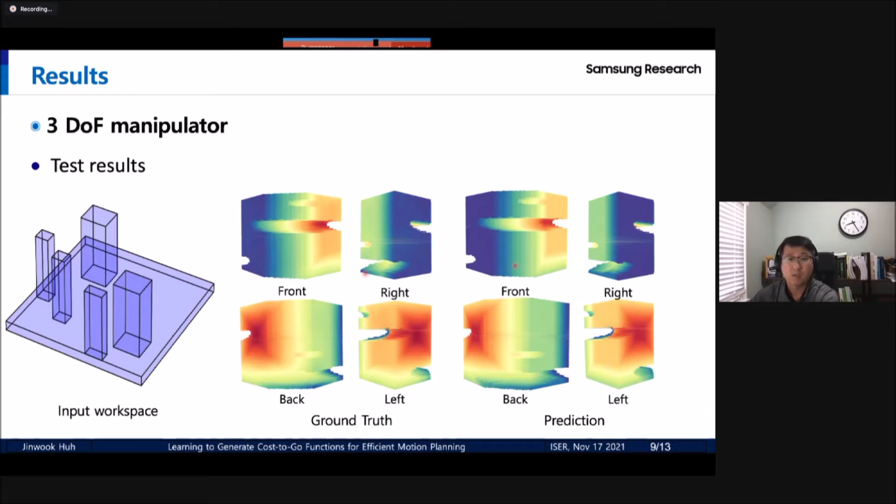In the 3 DoF manipulator case, we input the 3D voxel data into the network, and then predict the cost-to-go value in the configuration space, as shown in these figures. This result is very similar to the ground truth.

The average computational time for planning is less than 200 milliseconds. One good point about C2G is that it takes only 2 milliseconds to generate the parameters of the cost-to-go function. So in a new environment, we can easily generate a trajectory, and the trajectory generation time is almost real-time.

The contribution of this paper is that we suggest the C2G framework, which can generate a continuous cost-to-go map directly from the workspace without any discretization or considerable iterative propagation of cost values. It can generate a smooth and efficient path, and is significantly faster than traditional approaches.

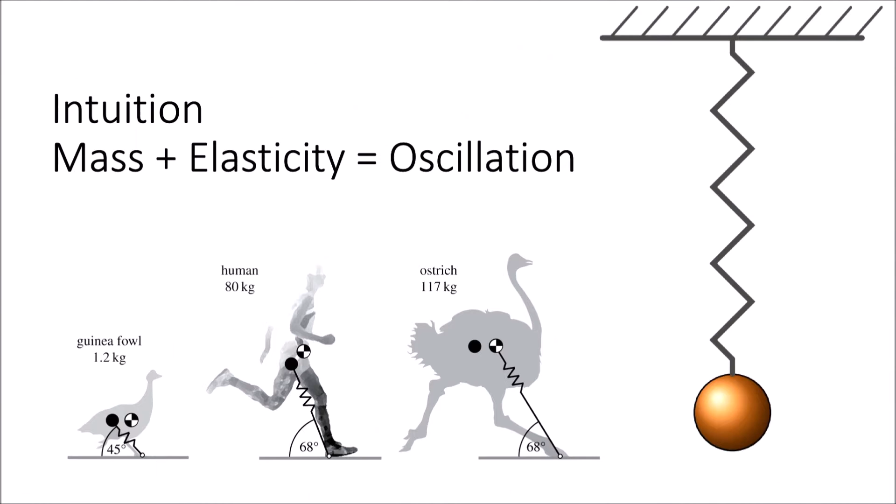You can see on the right the usual spring mass system, which helps us build intuition on a linear level, but there are a lot of studies on biomechanics backing up this intuition. This is indeed one of the reasons why we started putting elastic elements into our robots, leading to soft robots.

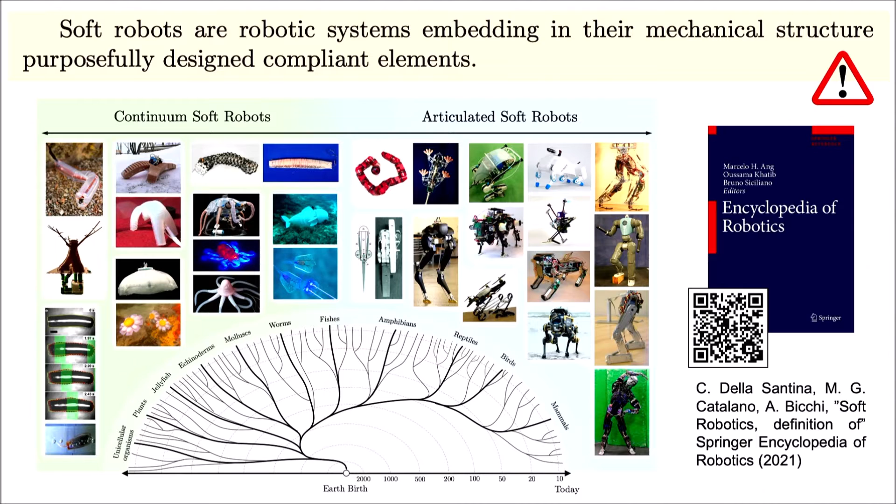Yesterday I discussed continuum robots. Today I will talk more about articulated soft robots or elastic joint robots. In general, these are systems more inspired by vertebrate animals, so we have a rigid skeleton, but then we have elasticity and softness at the tendons and joints level.

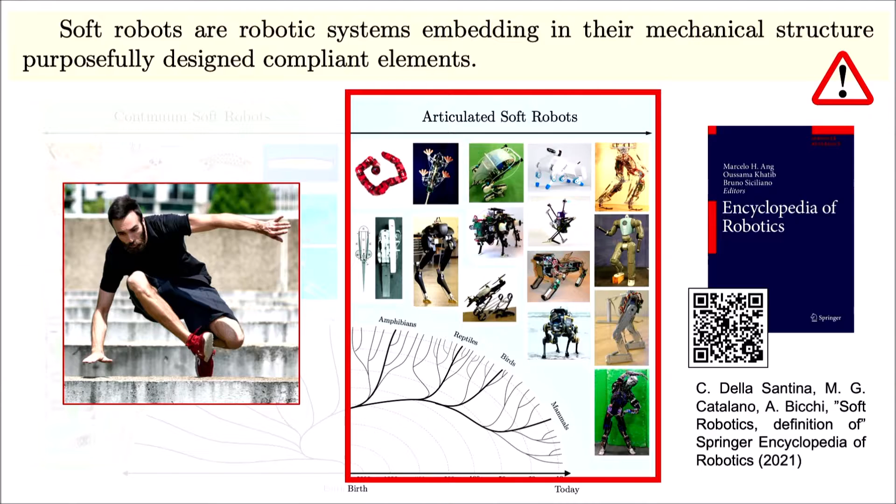If you take a mechanical system, start adding some springs, and just let it evolve, this is what you get most of the time. You start with some expectation that everything is going to evolve in open loop nicely, but what you get more often than not is chaos, even for very simple systems. This is just an open loop evolution of a double soft pendulum, a simpler model of a walker.

So what we've been doing in the past few years, together with Alin Albu-Schäffer, is introducing a framework we call controlling eigenmanifolds. In a nutshell, the idea is to go from the standard pseudo-chaotic behavior found in nonlinear elastic systems to recover some regularity.

The goal of this specific work, this ISER 2020 paper, is twofold within this framework: to provide a first experimental validation, since so far it's been mostly theoretical, and to understand if some closed loop control we had in mind could actually be useful in practice. I'll give more detail later.

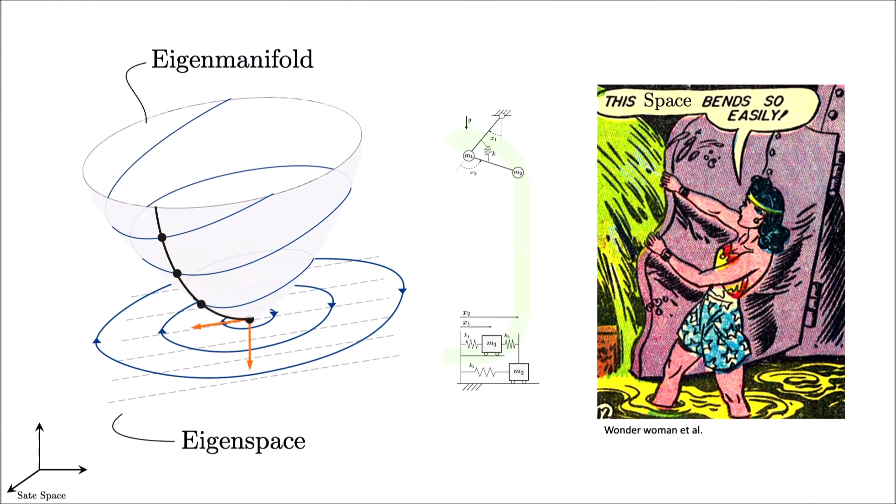Probably the most important thing is that, behind all the theory, right now we are evaluating these manifolds by hand, but we will hopefully soon release a toolbox for automatically extracting this structure for a given description of a nonlinear mechanical system.

Just to give you a flavor of how these eigenmanifolds look: this is a double pendulum with some elasticity. For each energy level you get a different nonlinear oscillation, and this is just one section of the eigenmanifold—these are open loop oscillations of the system.

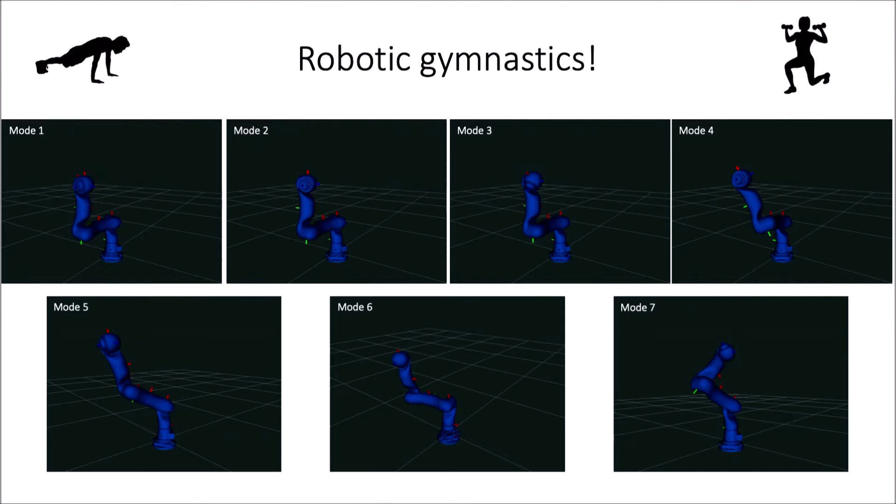And these are instead for a KUKA lightweight robot—if, just for fun, you add some springs in parallel and let it evolve in open loop. These are sections of each of the 7 eigenmanifolds this KUKA robot has, for a given energy level. It's not super clear, quite dark, but I hope you can figure out something from it.

So I will speed up now. Once you have a description of what the robot can do, you can try to design closed-loop controllers to help the robot express its capabilities, rather than forcing some behavior from outside.

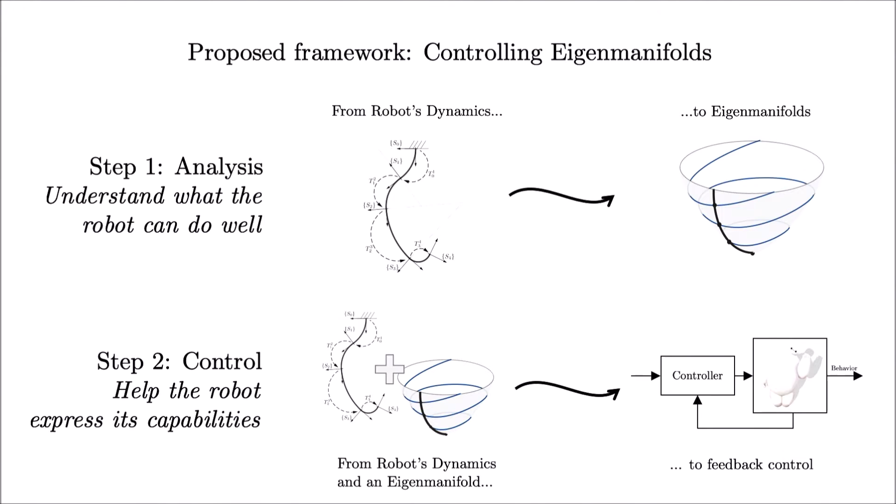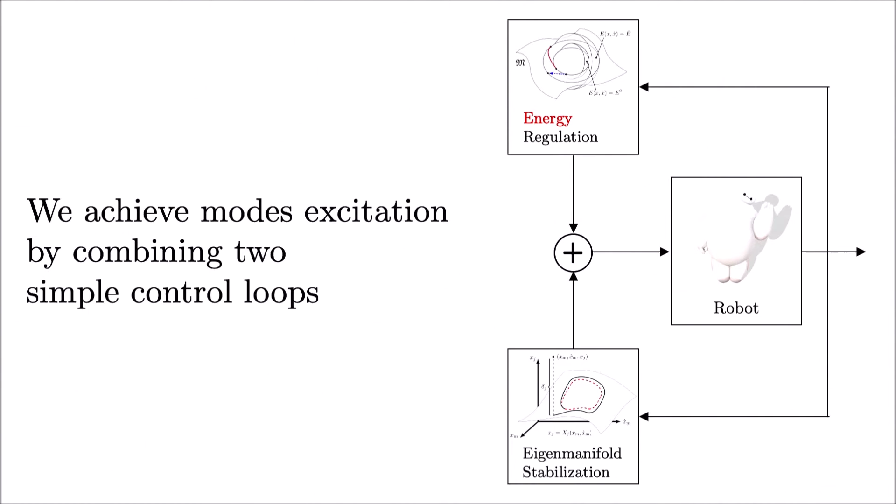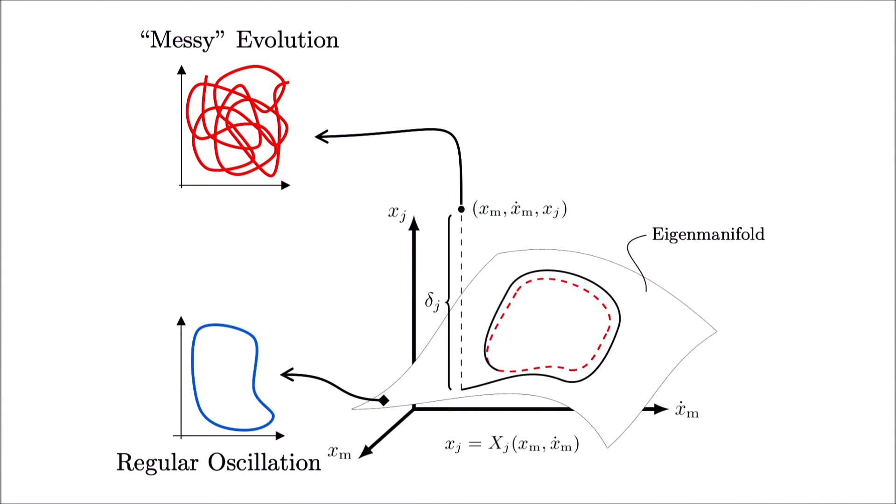And you can do that with feedback control. We do that with two kinds of hierarchical closed-loop thinking. The first part is eigenmanifold stabilization. The idea is very simple: if you are outside an eigenmanifold, the behavior is messy; if you are on the eigenmanifold, the behavior is nice. So let's just select one eigenmanifold and make it an attractor of the system by means of feedback control.

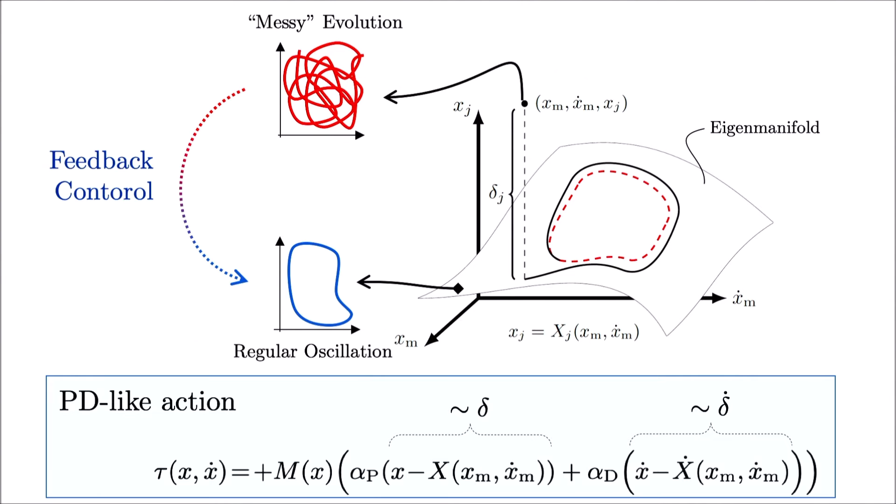And it comes out that already a kind of simple PD-like action works. This is nice. The problem starts with the other part, which is the energy regulator. Intuitively, you can label each of these oscillations with a different energy level, at least close enough to the equilibrium, and it's just a mess. So how can you regulate this energy without ever leaving the eigenmanifold, which is the important thing?

I guess none of you really want to go into details here, but this comes the second part of the ISER paper, which is to test a bit more of a simpler controller that in theory is super hard to prove, but in practice our intuition tells us it should work. And then they say, okay, let's first test it, and then we will try to prove it. It's just a very simple bang-bang action.

So the idea is that you have to compute a certain generalization of the energy of the system, and if you are above the desired energy, you just remove a constant amount - well, it should actually be the other way around - but if you are below, you inject energy. So it's a kind of bang-bang controller, and that's it.

Okay, so a lot of theory, but again, we are in experimental robotics, so let's try to see how this works to give some reality check. In the ISER paper, we focused on a segmented leg. It's kind of inspired by a small dog, and here you can see overlapped the kinematics where the springs are, and this is the evolution recorded for an open loop evolution.

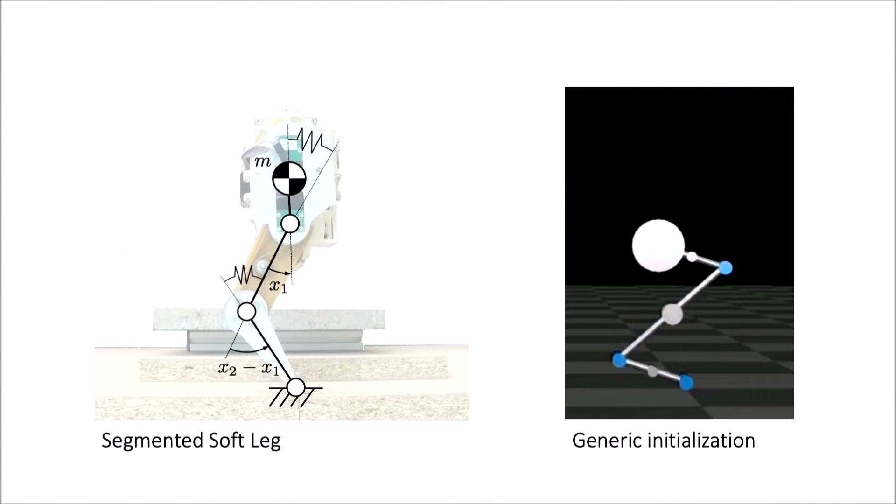And you can extract the modes. Again, this is kind of how the mode looks - quite a non-flat surface - and this is how the acceleration field looks, projected on the eigenmanifold. And this is just one of the modal evolutions, how it looks projected in configuration space.

So this is how the whole thing works in simulation, which is always easier - at least, maybe not easy, but easier - but I think it's nice to show what happens after a few seconds. This converges to a steady state, and the nice thing is that this is the control action, and the steady state has almost zero injection of torques or energy, because again, this is an open loop evolution of the system if you don't have dissipation. So you end up with this hyper-efficient oscillation in the end.

And something bad is happening. Okay... okay, it recovered, incredible.

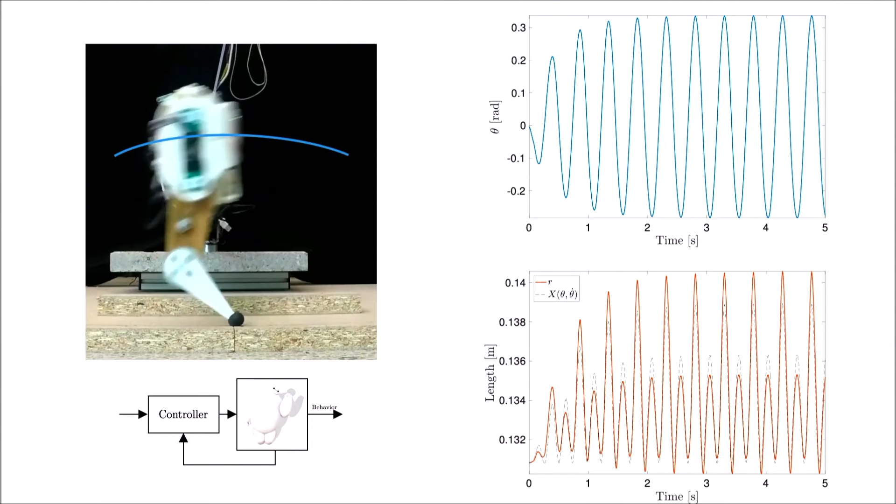So this is what, if you now go on the experimental side - we do the same thing, and this is the same controller, with the actual leg, and these are the oscillations you have for a few seconds of energy injection, and then it's this steady state oscillation.

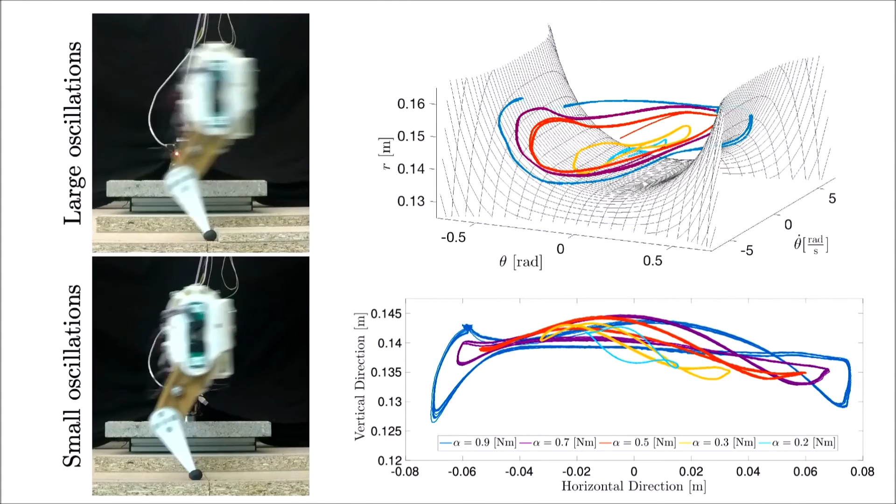And you can do that for different energy levels. These are just some others, and this is how the actual oscillations are - super repeatable, and they are quite close to the idea.

So you have an under-actuated system? No. We can discuss about that later, but right now, no. I mean, the real system is under-actuated, but the model is not.

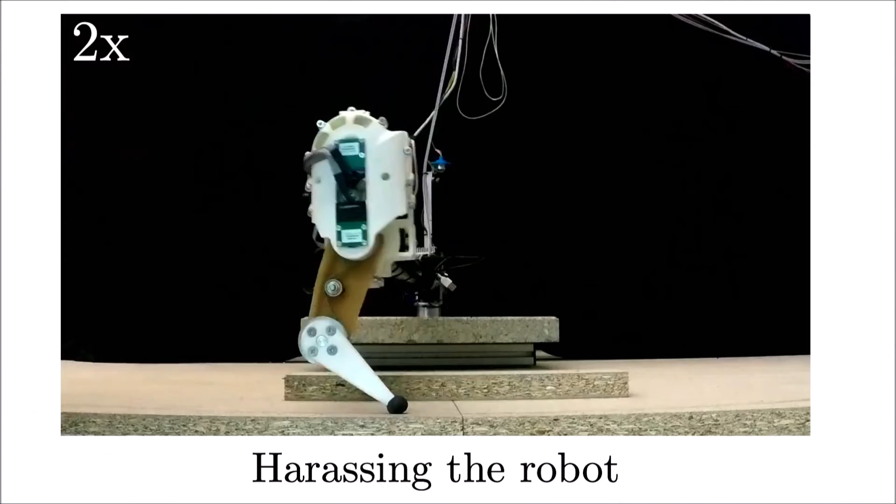But the nice thing here is that when you do a lot of theory and you have a lot of nonlinear control stuff, more often than not you end up with something that's super fragile, and this is how the whole thing behaves. So it's quite robust, and the intuition is that here we are just stabilizing the natural behavior of the system.

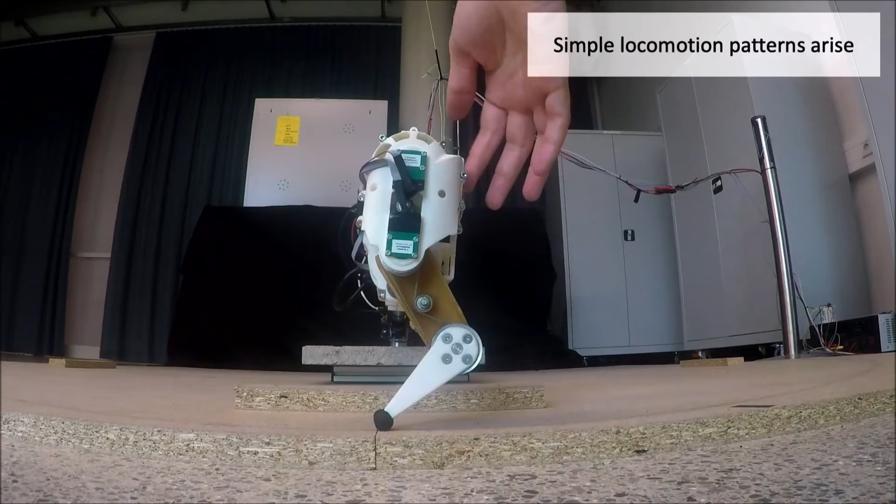Another nice thing is that if you play a bit with the mechanical parameters, without changing anything, you start seeing some simple locomotion patterns arise. It's something that came out during the experimental investigation for this paper.

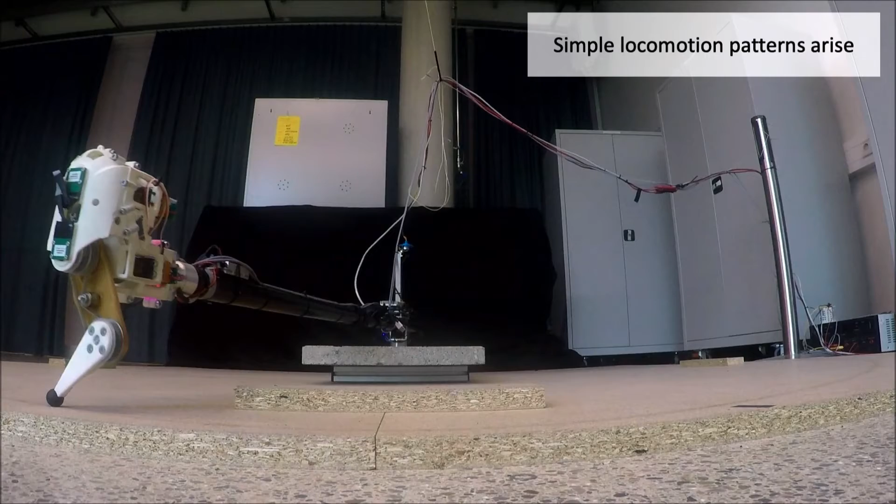It was not expected. And now, recently, together with a PhD student from DLR, we have tried to make it a bit more formal. It's submitted to this ACC conference this year. It's like this excitation of modes in this hybrid setting. And this is some very preliminary...

No, this is not what I want to show. Yeah, very preliminary experiments with a quadruped. The soft quadruped is made of four legs - four legs of the one that I showed you before.

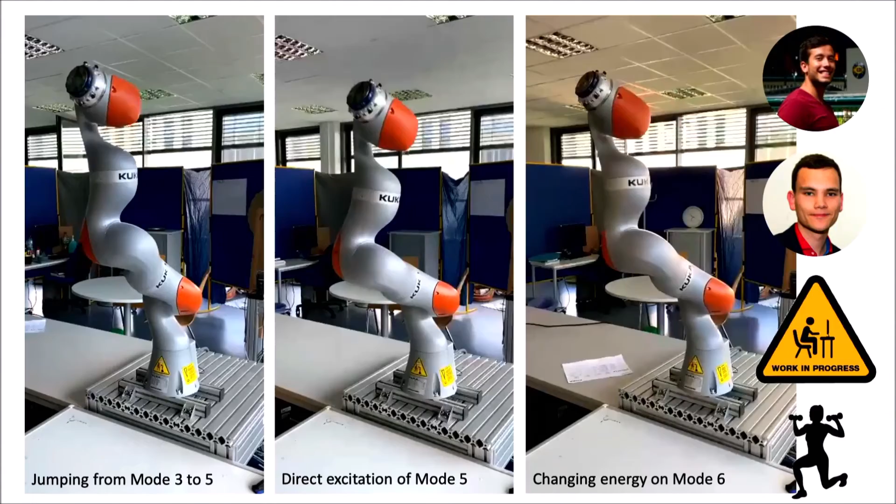Last but not least, these are not for locomotion, but these are some of the modes that I showed you before in simulation, and these are on an actual KUKA robot. We are not adding a parallel spring in reality, which is not possible, but we are simulating the presence of the spring. All the rest is just excitation of these natural behaviors.

And that's all. Thank you very much.

Are there questions? Yes, go for it. Thank you very much for this very, very nice presentation. So if I understood well...

So the control is based on the energy of the system. My question is, is it possible that for a specific system we don't have an accurate estimation of the energy? And if we have error in the estimation, can we still apply this type of control, in your intuition? Yeah, so the interesting thing is that the bang-bang control approach was used in this ISER paper, but this more recent one is based on a more continuous loop, still very difficult to prove. In all these systems you have a kind of first-order intuition about which is the energy, but you have a lot of uncertainties. Maybe in the KUKA robot a bit less, but with more real systems it's more uncertain.

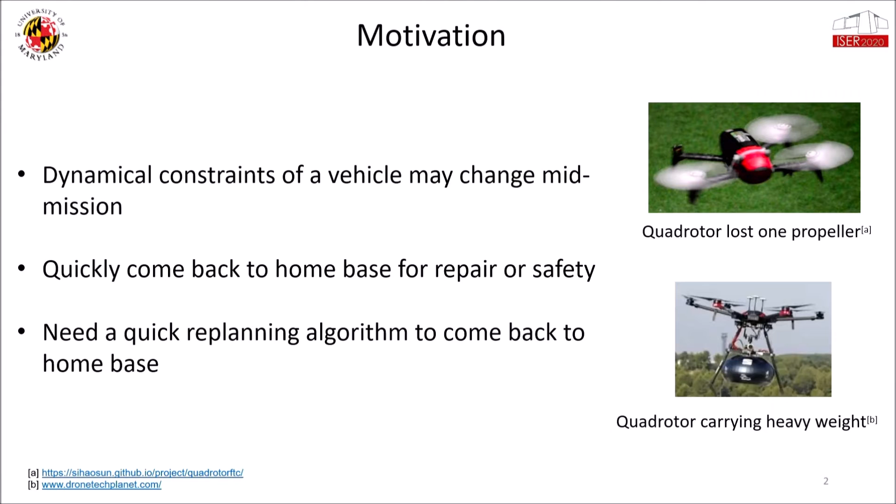So to this effect, we present an algorithm called RAPID, which stands for Rapid Planning for Interchange Dynamics. RAPID is applied in the domain of sampling-based motion planning.

To do so, it might use a sampling-based motion planning algorithm, something like RRT, which is a rapidly exploring random tree, to build the motion tree up, and then through the motion tree, find a path from the base to the package location.

So the question we were going to ask is, instead of replanning from scratch using RRT with the new trajectories, can we use the information present in the original search tree to speed up the replanning process so that it quickly comes back to the base location while avoiding the obstacles?

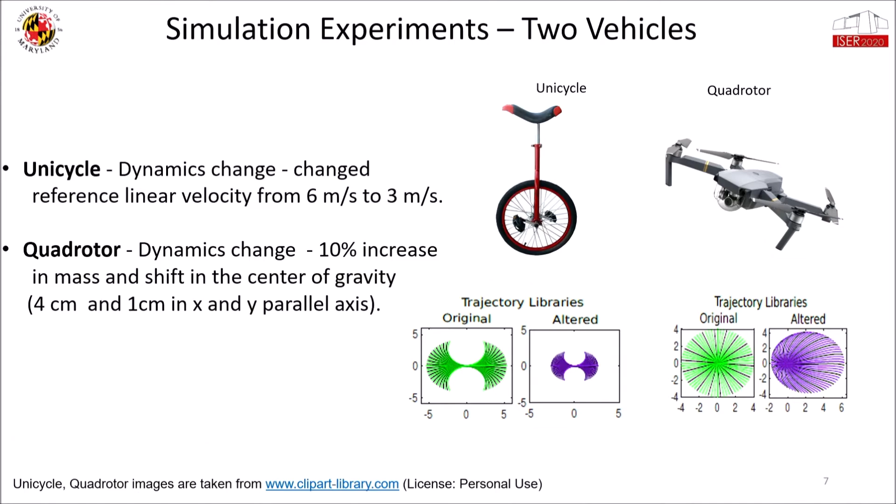For the comparison with rapid, we used two algorithms: one is RRT, and the second one is SST. And for each of RRT and SST, we use two combinations: one using the random propagation step, the other using the extend propagation step.

The number of scenarios that we use is 100, with each scenario having 3 trials. And the scenario is defined as a randomly selected base and a replan start location with a random number of obstacles in the configuration space.

Next, in terms of the metrics, we use the algorithm completion time, the path length, and also the flight time for the hardware experiments. The hardware experiments I'm going to talk about in a future slide.

Okay, here we show a video of the simulation experiment that we conducted for the unicycle dynamics. On the left, we have the rapid algorithm. On the right, we have the RRT algorithm. So I'm going to run this video now.

You can see in both of these simulations, we originally use RRT, the green tree, to find a path from the base to the replan start location. Then we use rapid on the left and then RRT on the right to find a path back to the base location. I'm going to run this video again because it ran pretty fast.

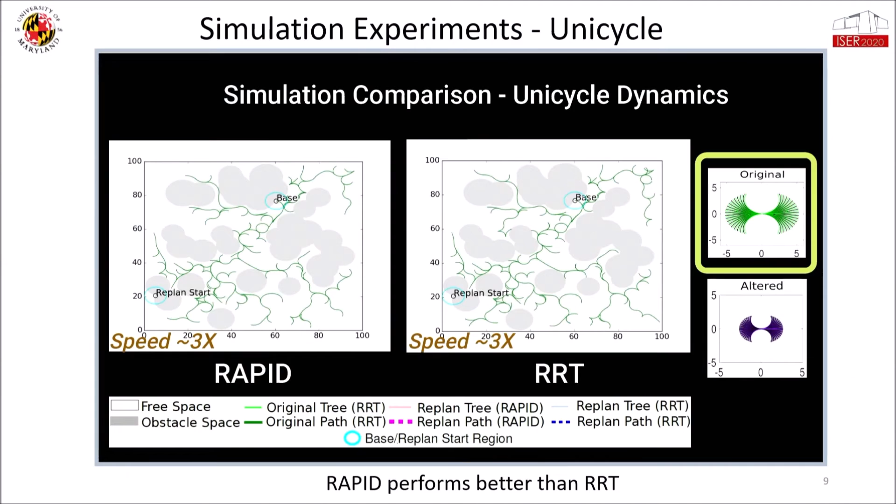So you can see on the left, rapid was able to reach the base location faster than RRT on the right. And you can see the path length too. The path length was better when using rapid than when using brute force replanning using RRT.

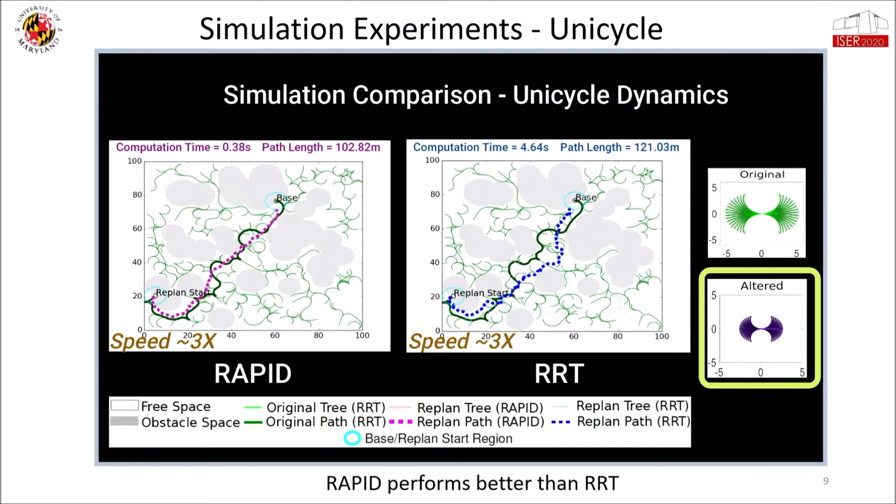Okay, so that was the simulation experiments. We next move on to the hardware experiments.

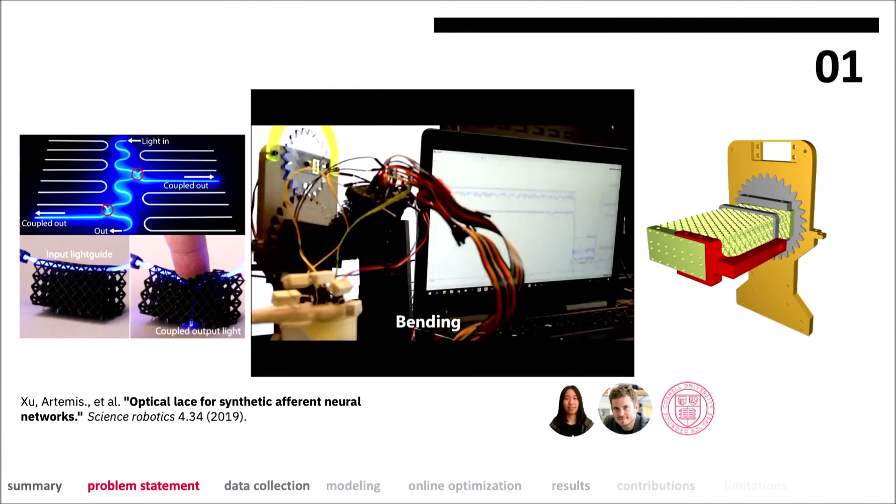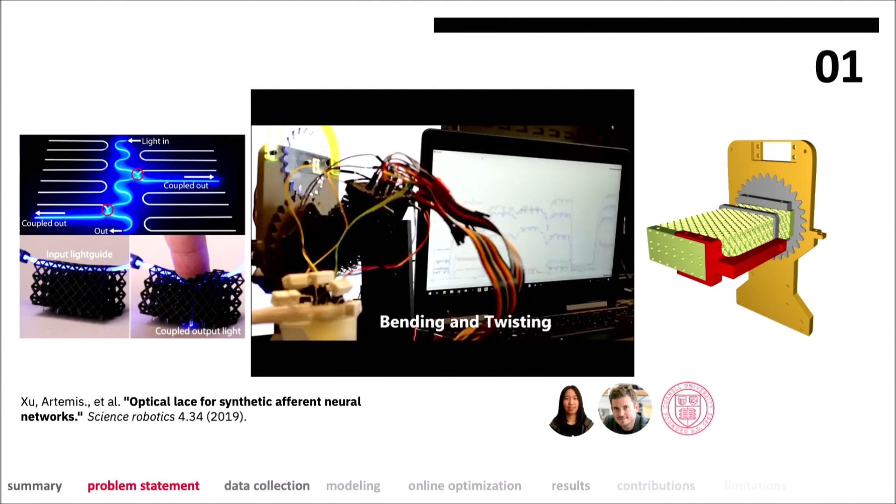Here is a video from the science paper where this was published by Artemis Xu. I hope you can see the sensor readings, but as you twist, bend, and stretch this soft component, you find a nonlinear relationship between the sensor readings and the shape of this mesh.

We were interested to know if we could use these sensors for control of a platform like this. Originally, the platform was mounted like this, as recorded in the video, with one servo that bent the surface, one servo that extended the surface, and another servo that twisted the surface. So there was a one-to-one relationship between bending, twisting, and stretching, and the control problem wasn't interesting at all — I didn't even have to implement a controller.

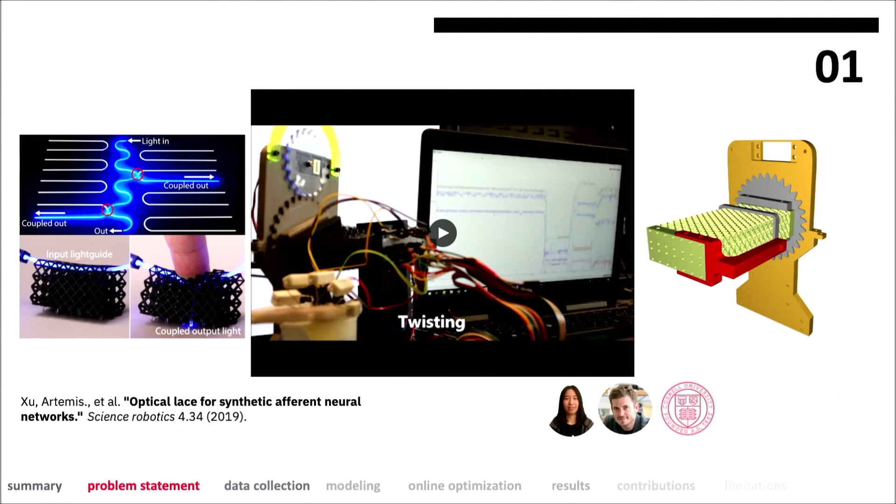So we decided to make the control problem more interesting by mounting this soft mesh in a cantilever setup, and we pull the end effector — we call this tip of the mesh the end effector — using Kevlar threads and two high torque servo motors.

Yeah, these were our materials. I'm going to move on to the next slide.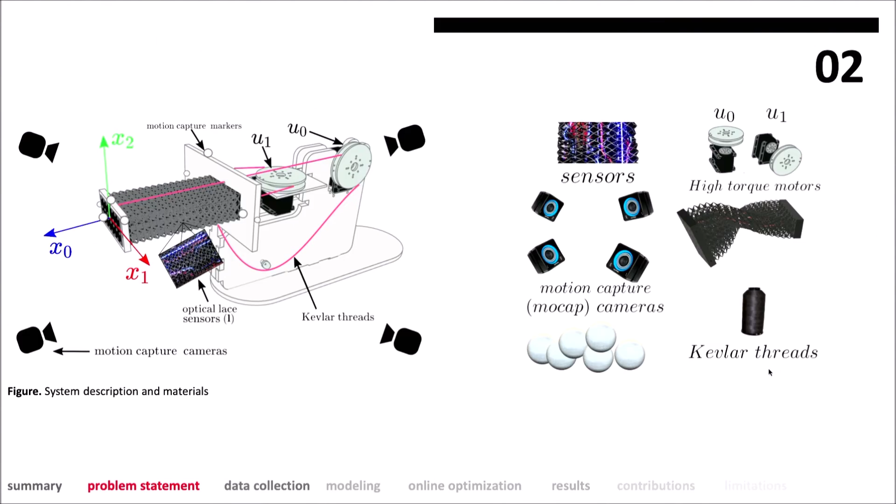So we figured this was a good opportunity for learning the forward kinematic of this end effector based on the feedback of these sensors. We wanted to build a controller where the only thing observable from the robot was its own proprioception, not signals coming from the motion capture. We figured it was a good opportunity for exploiting the patterns of these sensor signals to do control.

This required us to collect about 9 hours of data. To do that, we repeated some prescribed motions of the robot, namely a circular motion, up, down, and sideways in a zigzag, repeating each about 200 times.

What we recorded was the control inputs, meaning the servo angles, the position of the end effector, and the history of sensor readings. We collected this at 120 hertz.

To learn the transition of outputs between one discrete time step and the other, we used a particular network model layout proposed in previous work by Don Soloway from NASA in 1996. He originally proposed a neural network with a single fully connected layer.

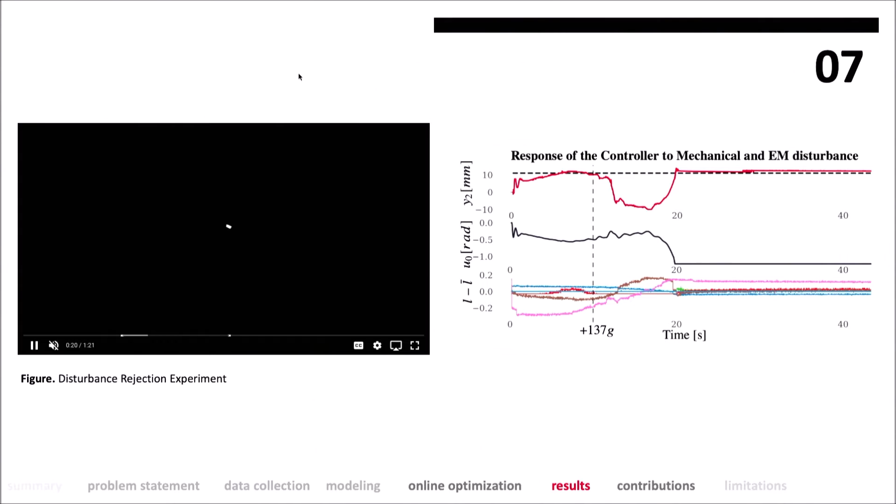So I was wondering if it was just a fluke, like the neural network model was completely ignoring the sensor signals. So I decided to see if the neural network would respond to weight disturbances, forces within the structure. And the reason why...

and it did, right? And here we put mass with magnets, and the magnets is because the requirement was that we wanted to prove that the sensors are robust against electromagnetic disturbances. But what I cared more about was the mechanical forces.

And the controller corrected for that, but it is important to notice that I kept the same saturation, and it did saturate when I was running that experiment.

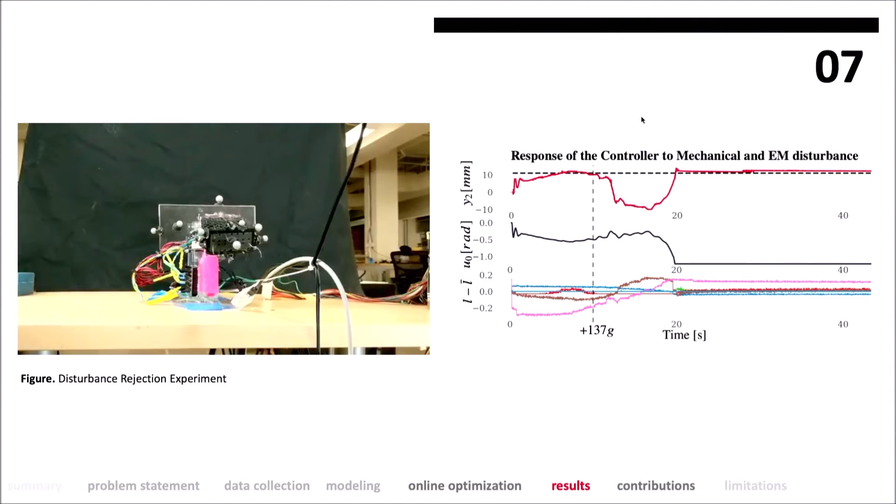I know I evangelize about these tiny computers. I like to put neural networks in microcontrollers.

And I keep evangelizing about this, so it would be disingenuous of me to not run this controller in the microcontroller. So I did. I implemented a set of tools that allows me to do the same computation that I did in the higher level Python prototype into this tiny microcontroller.

And here's the robot using only the sensors, not plugged into a PC. This cable is just providing power to the motors. And thank you so much.

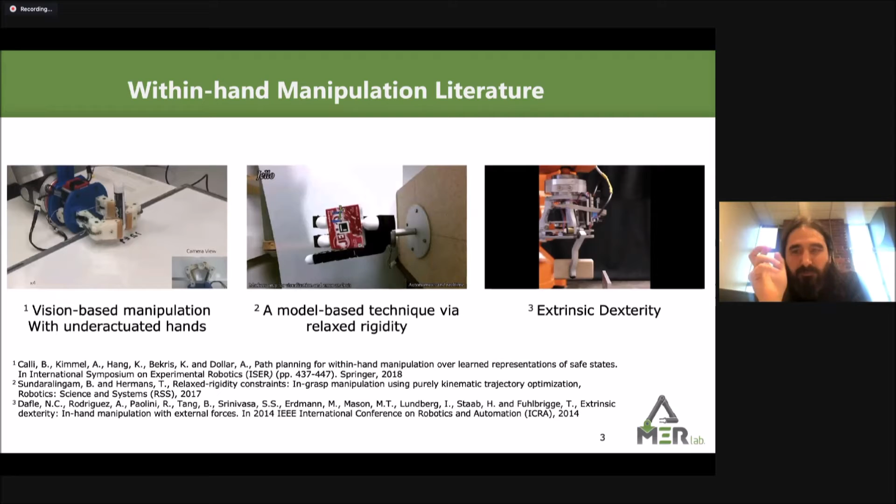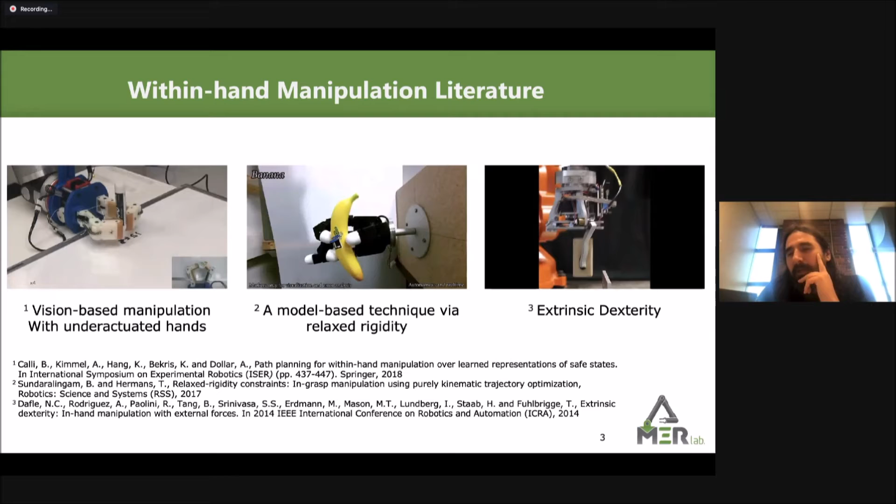And also there is this famous MIT Carnegie Mellon work on extrinsic dexterity, which mostly utilizes extrinsic constraints - so other objects in the environment - but also sometimes the hand-object dynamics in order to reposition the object within the hand.

However, when we look at all these systems, what we see is that it is still very, very hard to achieve within-hand sliding in a controlled fashion, and also having large rotations with these hand-object systems. For example, this is an experiment we were doing, trying to implement our vision-based control framework for controlled sliding, but we wouldn't be able to get repeatable results.

So the controlled aspect of sliding was not really there for us. But it's a very, very essential part of within-hand manipulation. So how to achieve that?

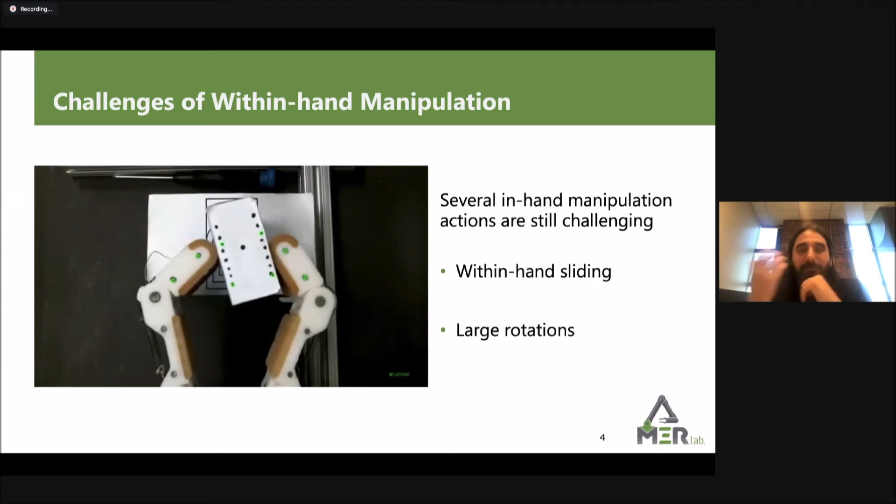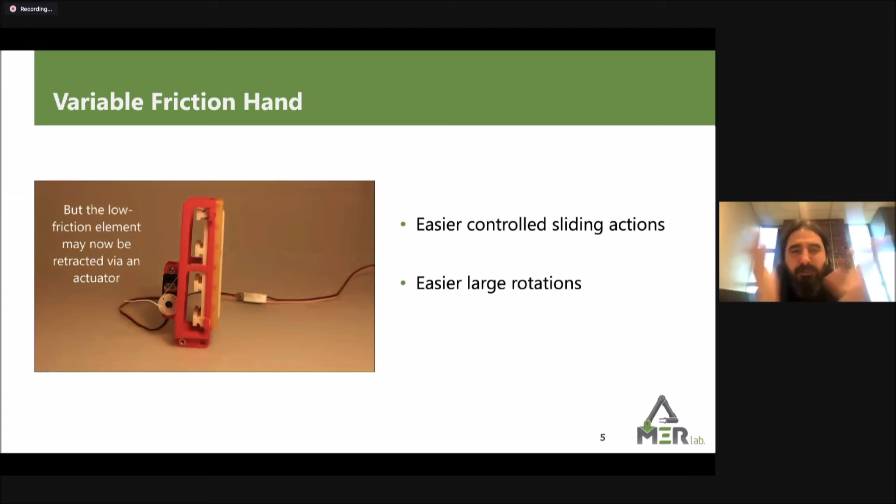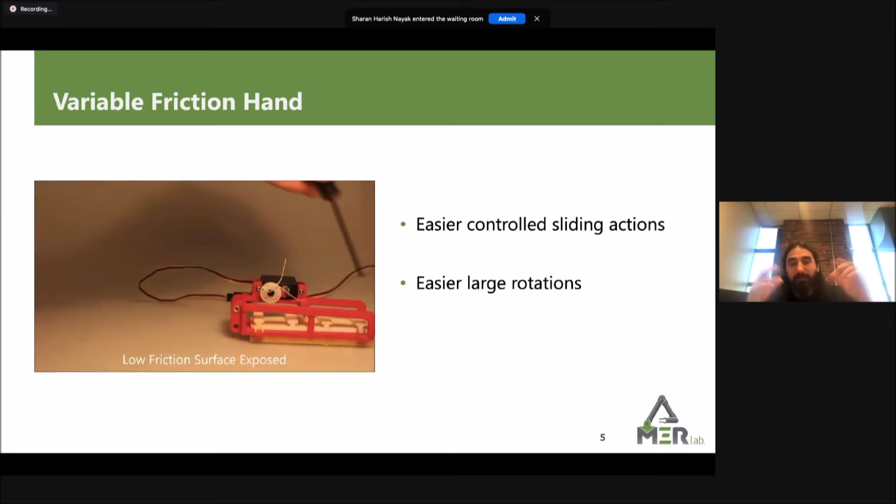In our prior work, we then started looking into this idea of variable friction surfaces. So there are basically two interlaced surfaces: one is a high friction surface, one is a low friction surface. So we can activate one or the other as we want, so the object either slides or rotates on the surface.

For example, here you see that the left finger is low friction. Therefore, the object slides within hand.

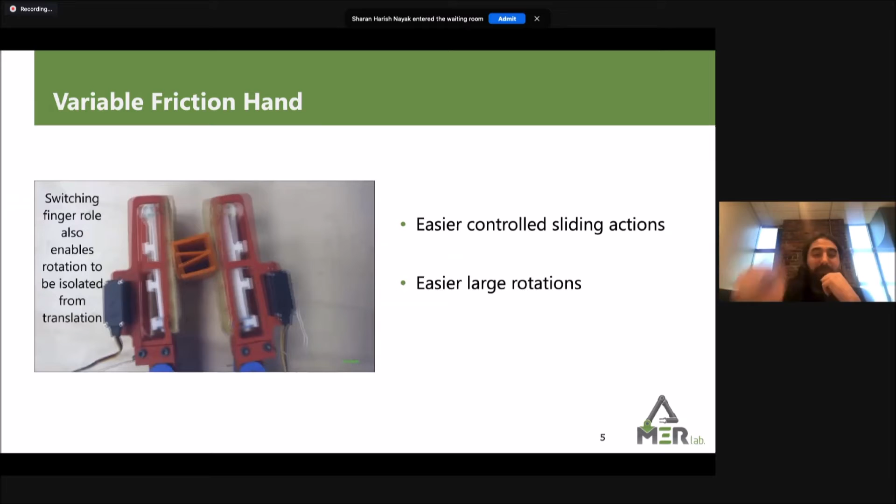By doing this kind of sliding motion, we can get this object to the tip of the finger. This is a very repeatable controlled sliding. Or in this example, the object will rotate 180 degrees but still maintain its same position. So this is a switching system.

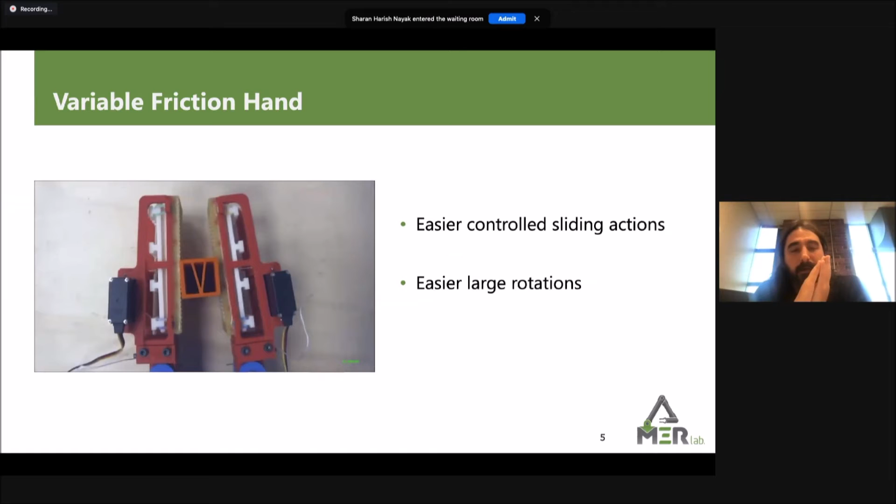This is a non-holonomic system, but it really allows us to stay within the quasi-static framework, and still achieve very consistent results for controlled sliding.

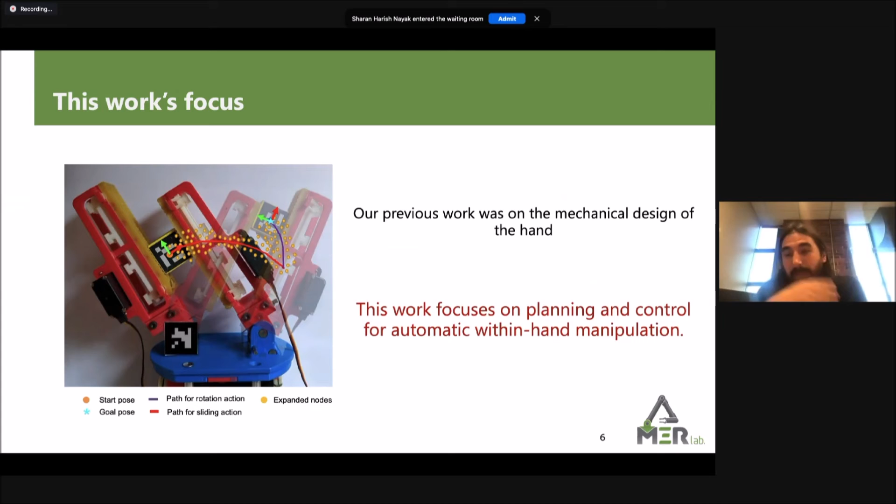Our previous work was on the mechanical design of this hand, and in this work we were focusing mostly on the control and planning aspects. More specifically, we talk about position and velocity kinematics of the hand.

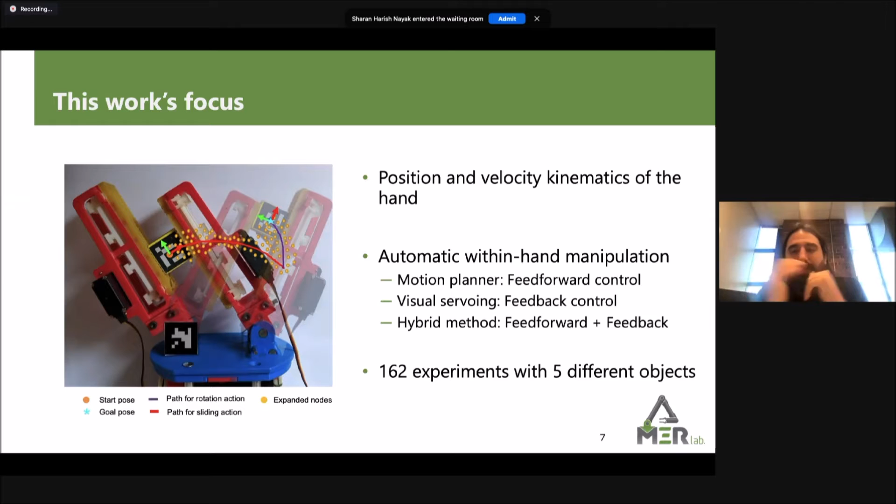We present here a motion planner and apply it in a feed-forward manner. We present a visual servoing controller and its performance, and a hybrid control that basically combines this motion planner with visual servoing. We implemented 162 experiments with 5 different objects.

Some assumptions and the scope of the paper: we are only focusing on planar within-hand manipulation here. Our system can work with or without a support plane. All the experiments that we have done didn't use any support plane, so that's a good feature of the system.

We assume that we know the geometric model of the object, but it doesn't have to be very accurate, and I will talk about it. We assume that the target object has at least one flat surface, so it shouldn't be all round, for example a circular object, for us to achieve controlled sliding.

When we look into the planner, we use the A-star planner. For reference, I added this picture here. This is the trajectory that the object follows in the image. This green star is the goal location, and the dot is the initial location. So what we basically have is a weighted A-star algorithm, and here we have this epsilon factor.

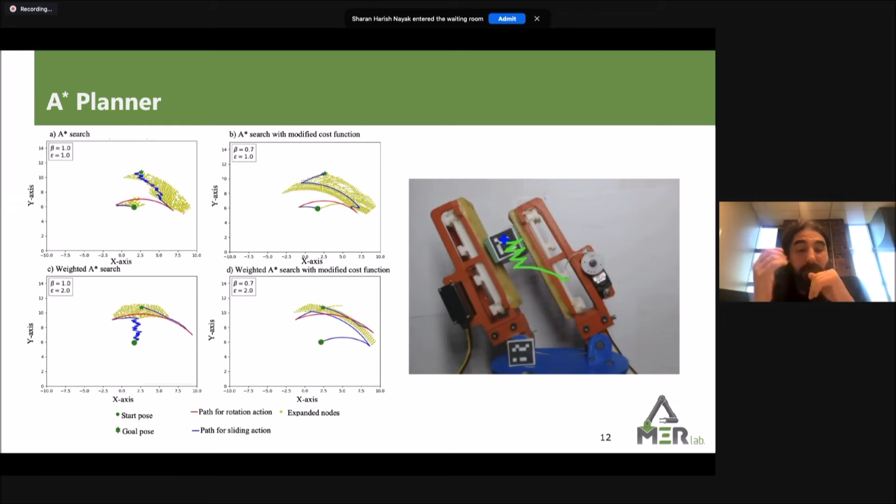The reason we added that is because once we have epsilon set to 1, of course we stick with the optimality criteria with our optimistic distance measures, but more nodes are generated, and that is time consuming. On the other hand, if we set, for example, epsilon to 2, we enforce more greedy search, and that reduces the number of nodes being generated, so it makes the system much faster to plan.

We also have this beta gain in our heuristic. Its main function is to encourage the system to stick with the previous action it takes, because since this is a non-holonomic system, in order to follow a straight trajectory towards our goal it basically switches back and forth, which is not a behavior we would like to encourage due to the mechanics of this particular system. Instead, when we set this beta to some other values, we encourage much smoother behavior.

Our closed loop system basically gets very accurate positioning, but of course, due to non-holonomy of the system, it tries to follow a linear trajectory in the image space. So that causes this kind of chattering that you see.

Also, planning for rotation motions in this kind of visual servoing scheme is not really straightforward, so we were using some heuristics in order to achieve that. But in general, this closed-loop system, as expected, provides us a good amount of positioning accuracy.

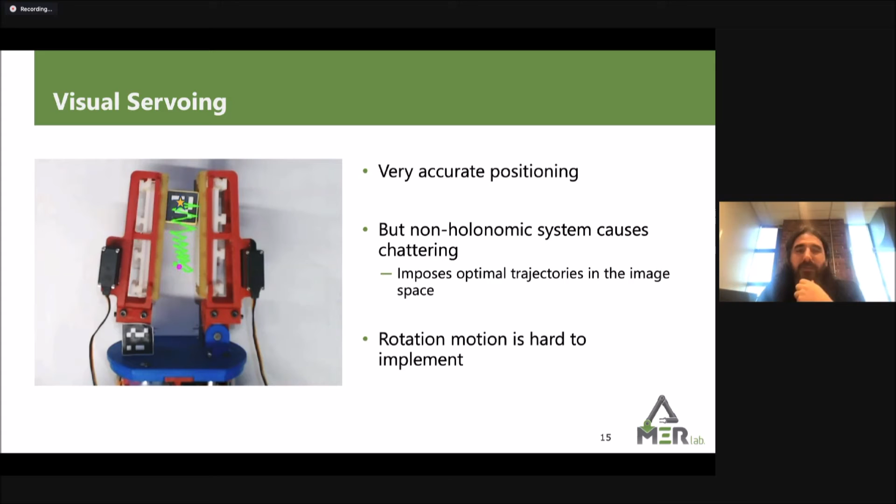And we have a hybrid method, joining the powers of these controllers together. So once we, for example, have a feed-forward planner, we have smooth trajectories, but as you can see right here, we cannot achieve our goal because we are implementing it in a feed-forward manner. The execution is fast and smooth. On the other hand, we have very high accuracy with visual servo control, but it just doesn't provide us very smooth trajectories.

Our hybrid method basically combines the best of both worlds: when the system deviates from the plan, the visual servoing controller kicks in and puts it back to its trajectory, and that allows us to stay on the trajectory and also remove some steady state errors.

If we see these systems in action: the feed-forward planner, as expected, provides us smooth trajectories and fast execution, but not really accurate, with a lot of steady state error and trajectory following errors. On the other hand, the visual servoing algorithm provides us really accurate positioning, but it is relatively slower in execution and does not provide us really smooth trajectories.

When we combine both of these algorithms together, we get both the accuracy and a medium fast execution. It's not as fast as the feed-forward planner, of course, but it still does a very good job killing the steady state error and giving us some smooth trajectories.

My name is Hamid Izadinia, and today I'm going to talk about our paper, Non-Prehensile Riemannian Motion Predictive Control. This is joint work with Brian Boots and Steven Seitz, and the work was done at University of Washington.

If you look at industrial robots, there are a huge number of robots working in manufacturing lines where everything is pre-programmed and determined in advance, and the robot works in a structured environment with a fixed setup.

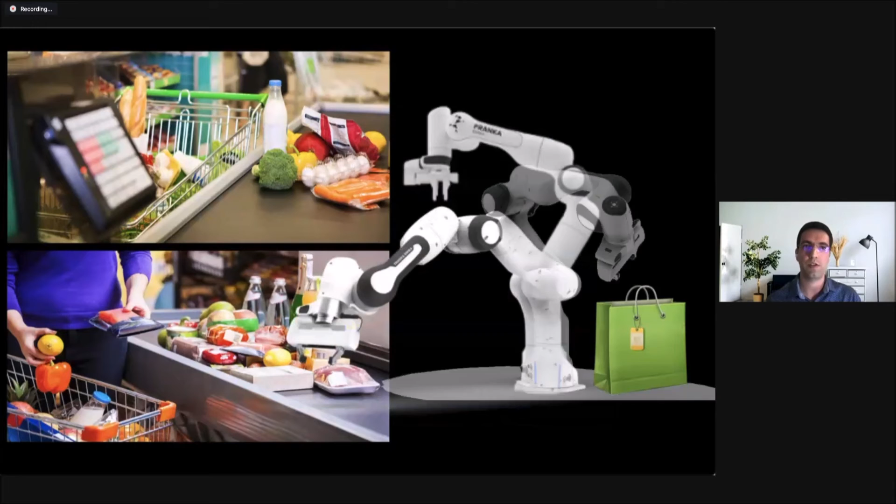And if we compare it with an unstructured environment, the problem becomes more challenging, as it needs physical interaction with an unstructured environment, where the robot needs to interact with a variety of objects with different shapes and sizes and manipulate them in an efficient way. This needs a cycle of perception, action, and execution in real time, done in an efficient manner for the robotic task.

So how can we do this? We proposed learning 3D recomposition for robot manipulation. This task of 3D recomposition is not a new task.

The first PhD thesis contribution, by Larry Roberts, was about taking an image of a simple scene, processing the edge information in the image, and recomposing the scene in 3D such that we can view it from a novel viewpoint.

Soon after, a project led by Patrick Winston and advised by Marvin Minsky at the MIT lab, called Copy Demo, took an image from a blocky world, processed the information of that blocky world, inferred the affordances of the blocks, and then tried to recompose the same scene using a robot manipulator in a closed loop manner. They did this a long time ago.

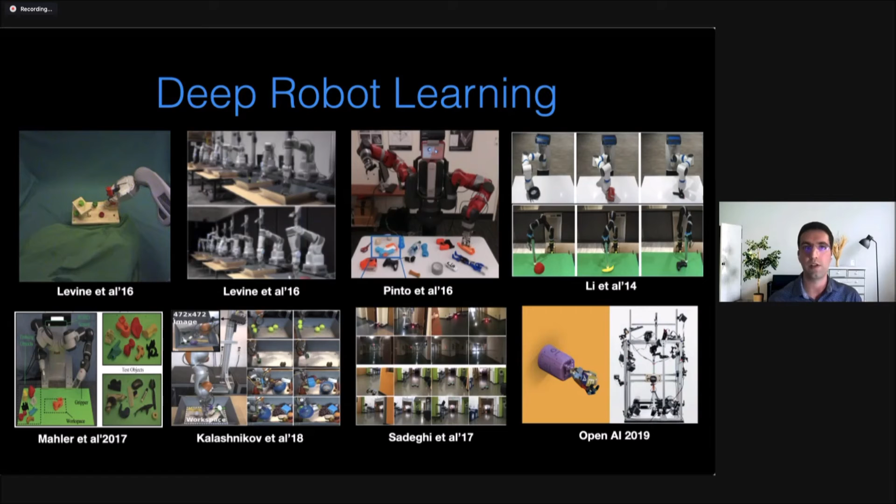Our work is also related to recent efforts in deep robot learning and deploying 3D physics simulation environments for learning robotic policy. This spans from learning visuomotor policy, domain adaptation, to transfer policy learning from simulation to the real world.

But in contrast, we learn to generate the simulation environment by recomposing the 3D scene and incorporating a simulation physics environment as a computational model for predicting the outcome of robot action trajectories in closed loop.

So we propose non-prehensile Riemannian motion predictive control, where we have controllable objects and a goal location, and there are some movable obstacles in the scene. We want to use the robot controller to push the object on the surface to the goal location.

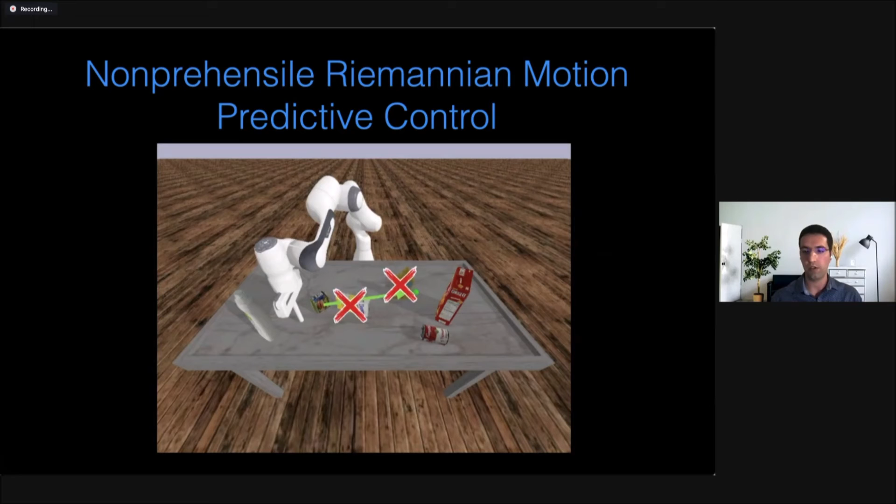Maybe the obvious path for pushing an object to the goal location is just a straight line from the start to the end. But if you do that, you'll collide with other objects in the scene, which are the obstacles, and it may also deviate the path of the object.

Whereas we learn a controller where we push the objects, we learn a policy that can push the object around the obstacles and try to get the objects to the goal location without colliding with the other obstacles in the scene. We also tested that on an RC car robot platform, where we push the goal objects to the goal location.

Conventionally, planning algorithms have been used for solving non-prehensile manipulation by incorporating search techniques to create a trajectory of kinematic movements for a robot arm to push or rearrange objects by modeling the dynamics of a robot arm in contact with the environment. Our approach is more general, and the task we consider is more challenging as it involves multiple object interactions in the scene.

So we use Riemannian motion policy, or RMP for short, where we construct a tree out of the scene, with a root node and leaf nodes. The root node is related to the configuration space of the controllable objects, and the leaf nodes are related to the task subspaces. For example, for the obstacles we have the avoidance task subspace, and for the goal location we have the attractor task subspace.

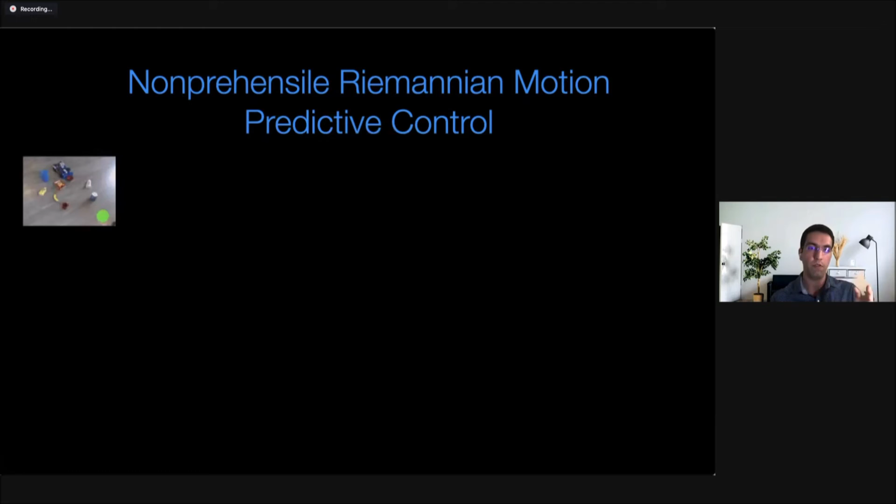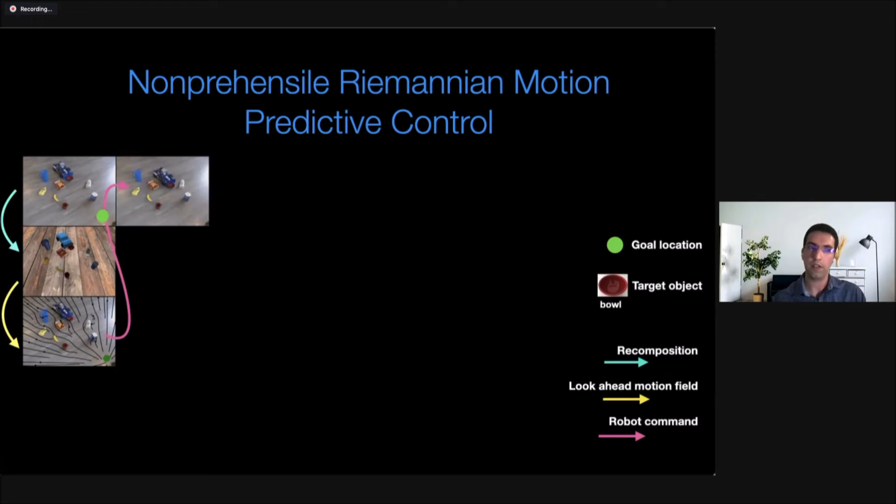So we have this closed loop control, where we take an image from the scene with the goal location and the target object. Then we recompose the scene into the simulation, the same scene simulation, and using that reward function, we compute the best control parameter for the robot and apply one action in that trajectory, getting to a new location for the robot, the target object, and the other objects in the scene. Then we recompose it again, compute the control parameter, and apply one more action, doing this over time until we push the target object to the goal location.

For example, in this case you can see the bowl gets to the green dot, which is the goal location.

For learning the recomposition part, we used 1 million synthetic scenes with diverse arrangements of objects and goal locations. For example, for the robot arm, we put objects in different locations and captured that in RGBD sensing, then used that for training our recomposition part. We did the same for the RC car environment, generating another 1 million synthetic scenes to learn recomposition for that environment as well.

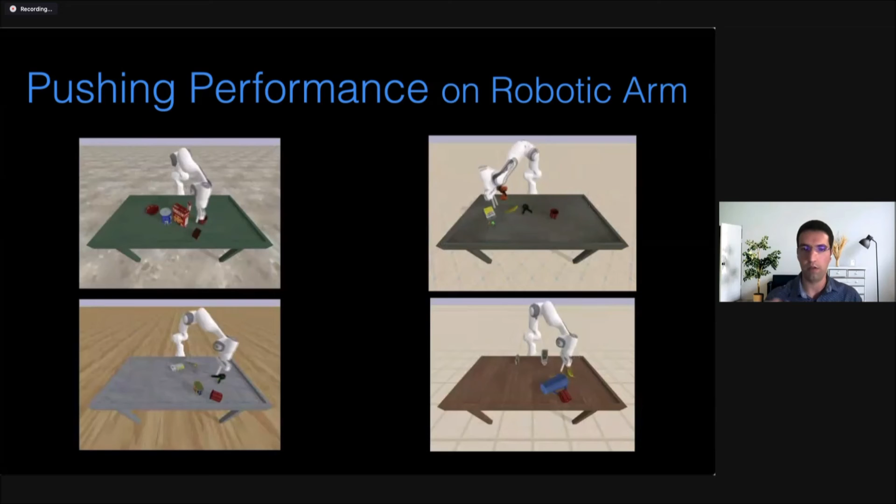This is an example of the learned policy for pushing different objects to the goal location. You can see that even for different shapes of objects, different geometry like a bowl, sugar box, banana, and a tool, we are able to push the object within the obstacles and get it to the goal location.

We also tested this on a real robot, a real RC car, across 32 real scene arrangements. For the evaluation criteria, we used average collision rates and compared with the best baseline algorithm from the simulation test. The baseline produced 65% collision, while our proposed method produced around 18% collision, much lower than the baseline.